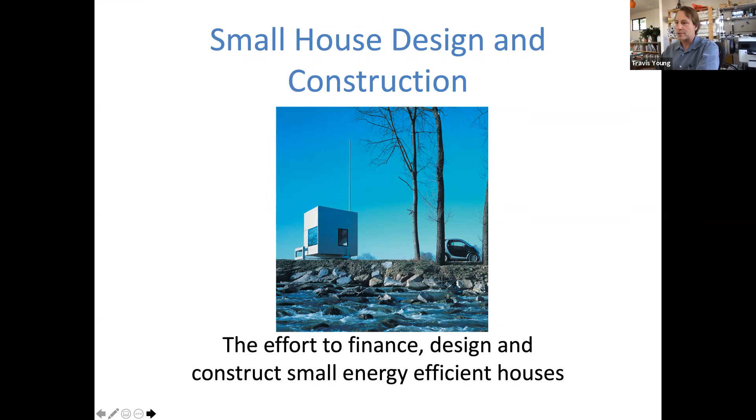If you like, we'll go ahead and share the screen here. Are you able to see my full slideshow? Yes, very good. Okay, so the title of the presentation is Small House Design and Construction today, and we're going to look at some of the effort it takes to do small houses, as well as some of the barriers.

So a quick overview of the presentation today. We're going to get into the definition of small house, because that's different for everybody. I'm going to look at the movement towards small houses, touch on some demographics and population issues forcing these changes and desires, some policy and zoning issues that affect small house design, several case studies with lessons learned including cost analysis, and finally a net zero affordable housing project.

So we'll start with definition. I wanted to speak to an acronym I'll be using here, ADU, which stands for accessory dwelling unit. This is defined in the International Residential Code as a building accessory to the primary use on a residential lot. The city of Austin in particular has an accessory dwelling unit ordinance, and accessory dwelling unit is the fairly common term for this second smaller house that might be on a single family lot throughout the country in different municipalities.

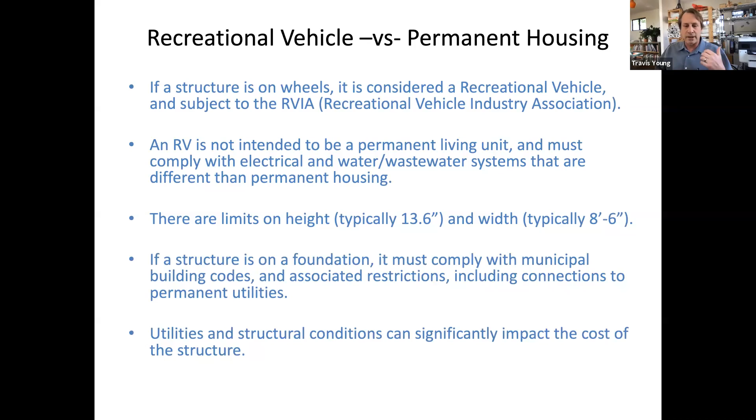But I heard many stories during our snow apocalypse about people going into their RV because they had a solar generator and were able to get a little bit of heat in there and using that as a place to weather our weather event. Here you go, just one of the latest additions.

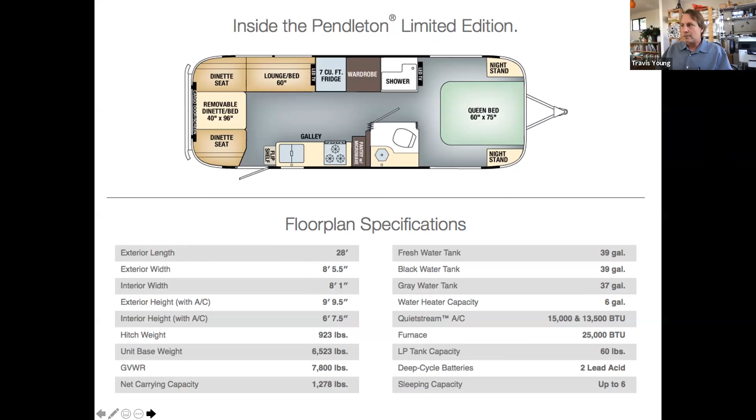You got 2-bedroom potential with the removable dinette. These are really built like ships, very, very efficient uses of space.

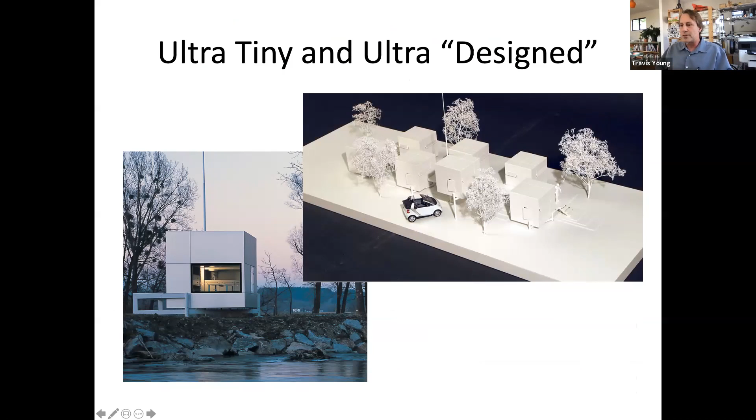Another aspect of these ultra designed, ultra tiny homes. This is a good example where you can share 76 square feet with 8 of your favorite friends. They look very happy.

So a brief look at Texas's demographics. In Austin and Houston, for example, we have between 40 and 60 people a day moving here. And most of these people are single or two-person couples. They're maybe non-married or about to be married. Many of them are college educated in Austin, for example. And the median household income is about $71,576.

An interesting statistic associated with this population growth is that the number of households with children has declined. So we have smaller households, and that is also pushing this desire for maybe a smaller unit. They haven't really had their children yet and realized how much more space they need to have.

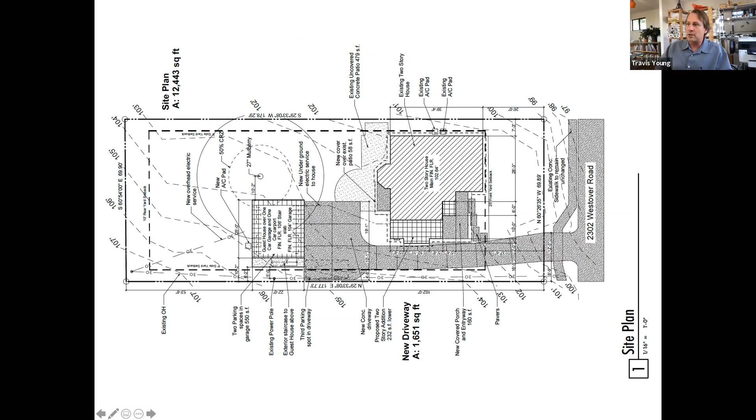This particular project was permitted as two-family, meaning it was an accessory dwelling unit under the City of Austin code for the garage apartment. However, in this neighborhood, an attorney who lived several houses down saw this going on, went online, and saw it was a second living unit. Even though a living unit already existed there, he sent an attorney's letter notifying us that this was not allowed, that we could not have a second living unit on the house, and that he wanted it removed. This happened about halfway through construction.

So the City of Austin has a regulation called a guest house — any lot over 10,000 square feet can have one. There are restrictions by City of Austin zoning code that you cannot rent it out to paying guests, so you couldn't do a short-term rental with a guest house. But the size limitations from the ADU don't apply. So a guest house could be allowed, and since they wouldn't be able to rent it to anyone, it wouldn't damage the value of the attorney's property, which was part of the attorney's claim.

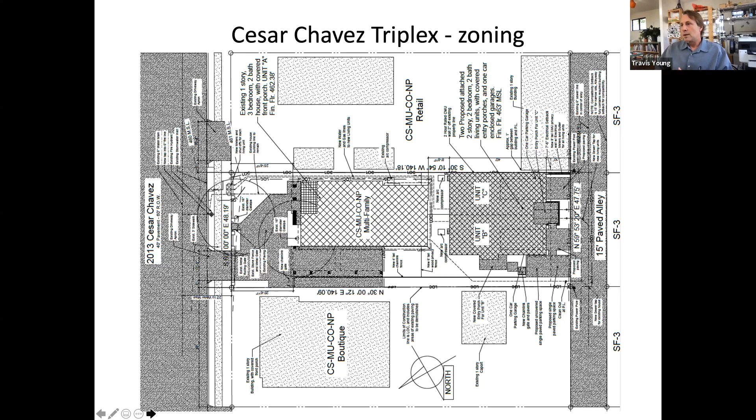So here's a quick look at the plan. Both units are about 1,100 square feet. We have a 1-car garage for both off the alleyway, a bedroom and bath down, and then upstairs you have the living, kitchen, dining space and another bedroom and bath up.

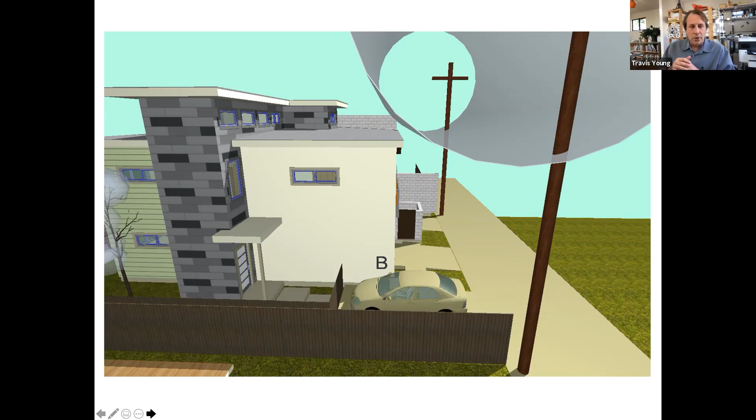Although the CS commercial services zoning allowed us to have a 0 setback condition up to the property line, the City of Austin utility has different ideas about that. We had overhead power lines in the back of the property. This cylinder you see in this 3D image is around the overhead single phase conductor that's on the end of this outrigger. We had to be 12 feet from that, and you can see I'm just clearing that with my roof line.

So even though zoning may allow you to do something, there's a lot of other bodies that have a say about what, when, and how. Even though there was no public utility easement here, they still review this plan. I didn't pick out the colors, nor the Home Depot fan.

So at the time I did this, even though we had the MU zoning, the City of Austin has 2 departments for building permits, one for commercial and one for residential. Residential looks at duplexes and 2-family and single family, and commercial looks at multifamily. Well, because the building itself was a duplex, the commercial permitting didn't look at it.

However, they looked at it for site planning, and for site planning we got a site plan exemption because we weren't exceeding a certain amount of square footage in terms of new impervious cover. This back area was paved and had a building on it, so we were under this limitation of what we call a site plan exemption.

So I got the site plan exemption, and then I went to go get the building permit with commercial, and they said, we're not going to look at it, you got to go to residential. So I went to residential, and they said, we're not going to look at it, it's multifamily. So they essentially gave me the building permit with no plan review because neither group would look at it.

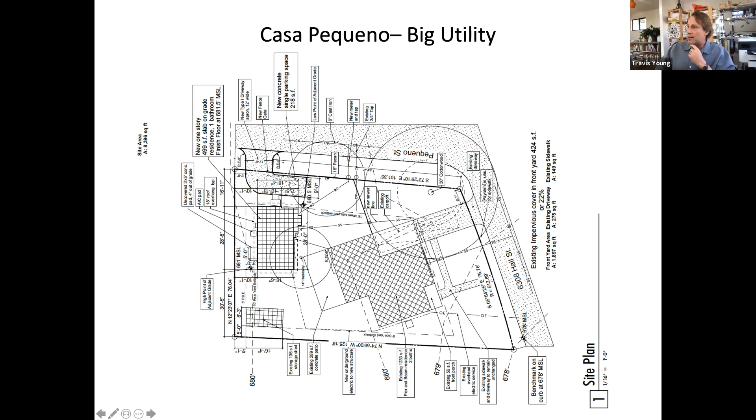Here's a quick look at the plan. It's 500 square feet, a little petite house. She really wanted a king size bed and a fireplace. So here's some 3D looks at the building.

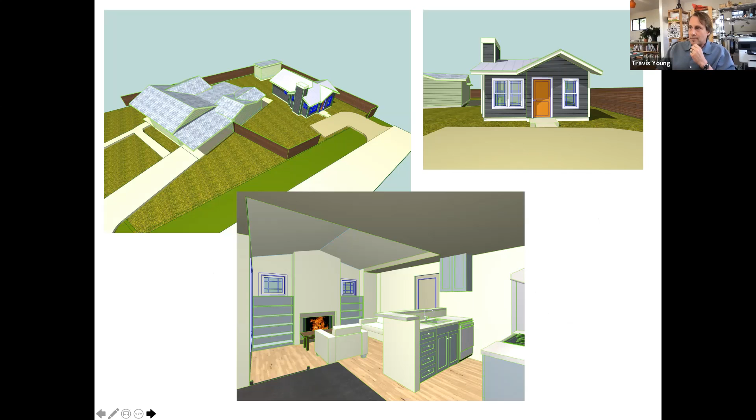Now, at the time that we did this, the utility required a new water meter if there was a second living unit, regardless of size. So because of that, we had to go through a utility tap permit process. At the time, there was no timeline for when the utility would have to review these plans. They didn't have a lot of mechanisms for reviewing them in residential, and they had just shifted from actually installing a lot of their own taps to hiring third parties, making the developers or whoever was doing the work hire a third party to do the utility lines.

This ended up taking about 4 months to finally get the building permit. We had to pay a civil engineer to do the utility plan and pay for this new water meter and tap—those were permit fees. And then we had installation costs from a third party to go out there and dig in the right of way. They have to be a bonded contractor, at $15K. So just the utility costs alone for a 500 square foot piece were $42 a square foot.

And the client, of course, was like, look, I look on Builder Trend and this is how much these houses should cost. Why is it costing this much?

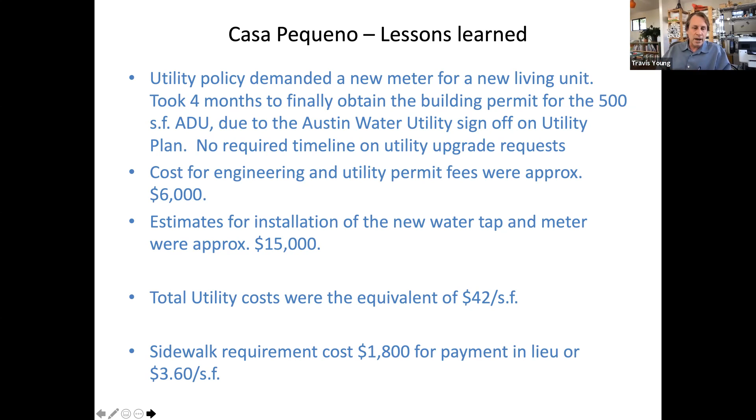Well, unfortunately, in this case, the mother-in-law's cancer progressed too rapidly, and she ended up passing away before we were actually able to finish the project, and it did not get built. The property owner sold the lot to a developer and moved out of Austin, who immediately put a much larger ADU in the back.

Now, in 2015, City of Austin tried to say that they could get approximately 50,000 new living units if they allowed an ADU to be on all of the houses. In the past, it was restricted to 7,000 square foot and larger lots. The new zoning ordinance allowed the ADU to be on 5,750 square foot or larger lots. This covers the vast majority of lot sizes in the central city of Austin.

They put a limitation on the size of an ADU: only 550 square feet could be on the second floor, so it doesn't loom over your neighbor. There's a lot of concern in neighborhoods that these buildings in the back might loom over the neighbor. They said it could be located to the side and rear of the principal structure.

And the parking requirements—initially when you could do an ADU, you had to provide a single parking spot for that ADU, like you saw on the small house I had to do, which would often include having to have an apron in the driveway and roadway to get there, and you'd have to pave it, et cetera. But if you were within a quarter mile of the Imagine Austin Activity Corridor, which is primary corridors where they're trying to encourage pedestrian traffic, then you could get rid of that parking spot.

Also, and not in small part because of my advocacy and 3 or 4 other architects, the Austin Water Utility, with our experience with that small house, changed their policy and allowed people to start doing ADUs when they saw the real economic impact on a small family living in a house, the economic impact of the utilities. They changed their policy, and now we are allowed to do an ADU in the back of the house and stay on the same meter as long as we don't exceed a total of 4.5 bathrooms on the site, or less than 45 fixture units. This is a critical policy change that's affected the ability to build ADUs.

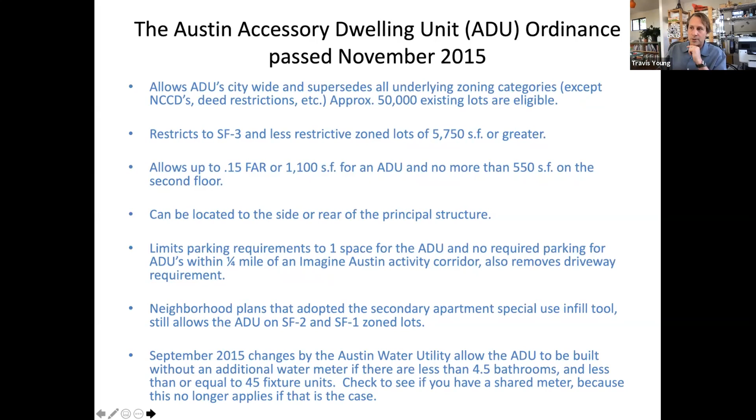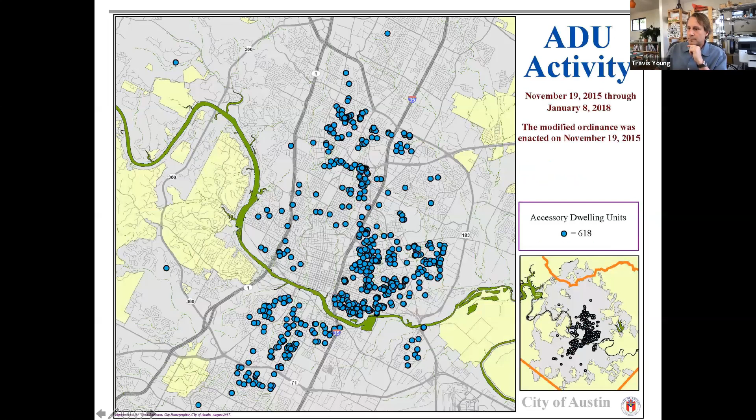With the ADU ordinance, we had a spring up of a nonprofit organization. Just wanted to talk about these fellows because they're great. They provide affordable housing, and a turnkey solution to get you what they call the alley flat, in a lot of the east side houses or neighborhoods of Austin where you have existing single family stock, smaller lots, but alley access. They provide this service for folks that meet 80% of median family income, providing subsidies to not only design and permit, but also construct small houses in the back of properties. Here's a couple of examples of those.

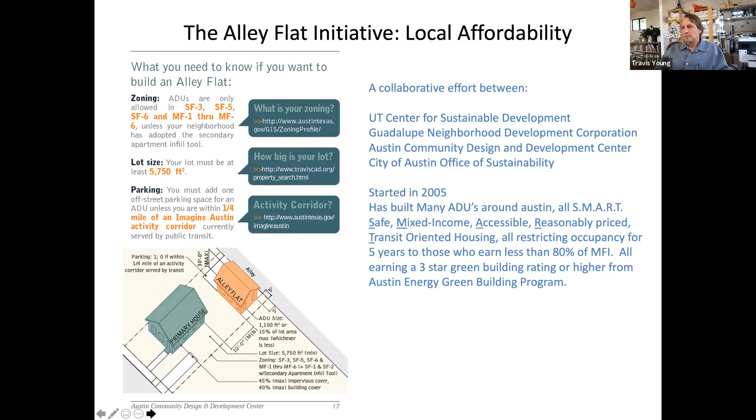Sweet. You can see 849 square feet, 2 beds.

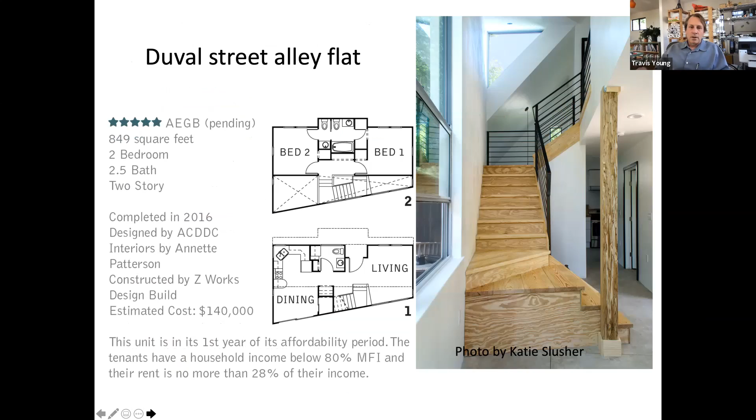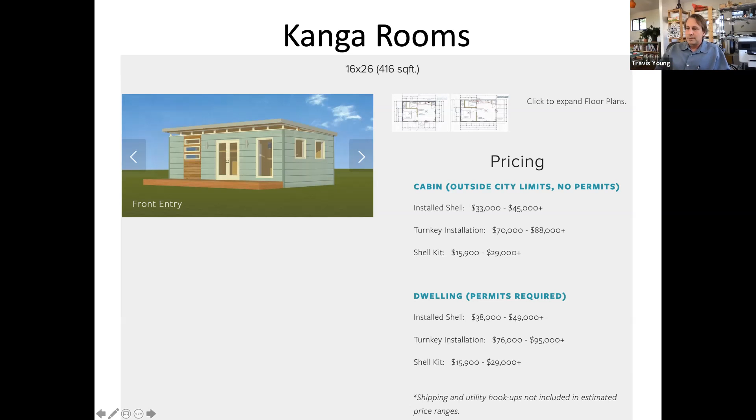There's also been some market rate groups. You saw in that video the one that went to the big 330 square foot house - that's by Kanga Rooms, they're still here in Austin. Just wanted to point out one thing here: their turnkey installation is 70 to 88,000. Of course that does not include shipping and utility hookups. Not a small amount of money.

So we did not put a kitchen in it. Now, the City of Austin defines a living unit as having all needs for sanitation, sleeping, and the preparation of food. If you eliminate one of those, then it's considered an accessory structure. Once you provide all of those - a kitchen sink, a bathroom, and sleep quarters - then you are an accessory dwelling. So we permitted this as an accessory studio that did not have a kitchen.

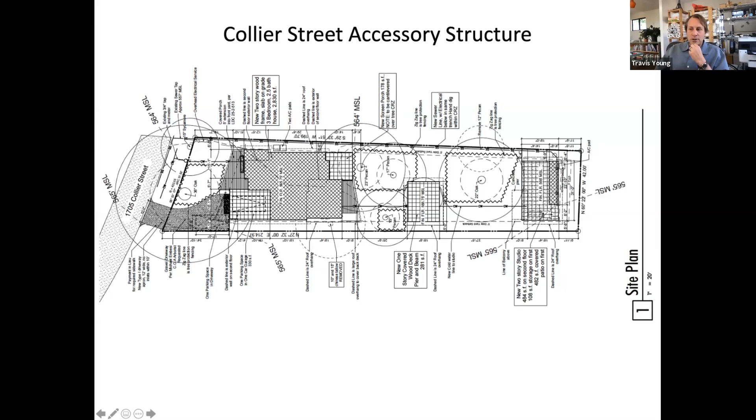It's an efficiency room here with some built-in cabinetry, Murphy bed, tight little bathroom, and then downstairs is a covered patio. One of the concerns with these - we'll get into this a bit with our net zero stuff - is how do we get hot water. In this case, this whole build was a 5-star green build. I was the architect and builder for the project, and we had enough space to design for a heat pump water heater, which is allowed for a house that has no gas. We elected to eliminate gas from this site and use all electric for this development.

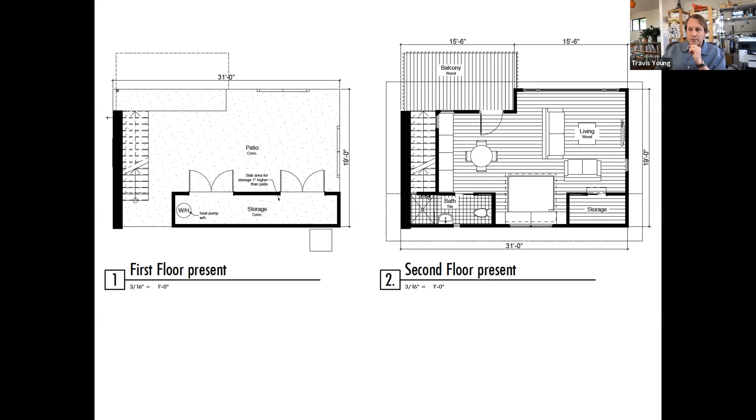I've got 2 speculative projects we're going to take a quick look at, built after the ordinance passed, around 2015 and 2017. We have a single family house and an accessory dwelling unit in the back.

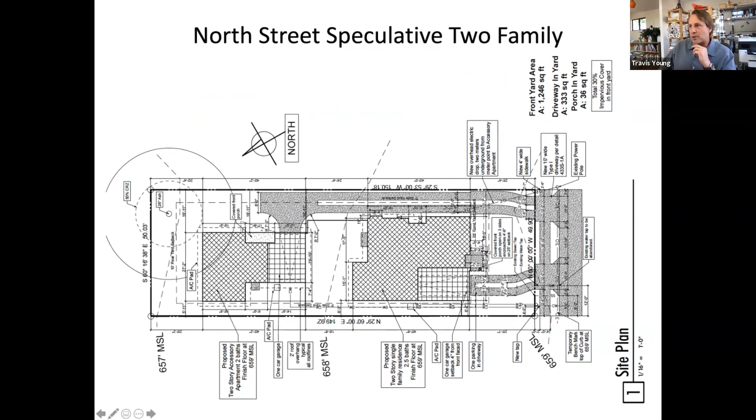This one is an 850 square foot unit with 1 bedroom and a bath down in a very tight space. The city of Austin has a restriction on gross floor area for residential construction within the urban core, and anything over a 15-foot high ceiling has to be calculated twice towards the limitations you're allowed on the site. So in this case, we have a 14-foot ceiling, which is just under, and we have another bedroom and bath up on the 2nd floor.

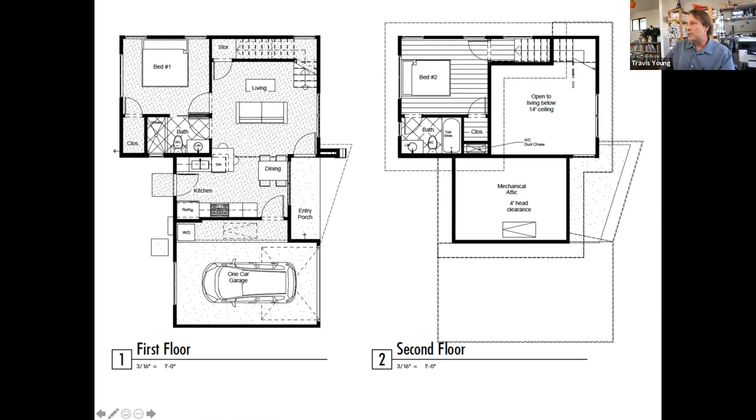On this 2-family spec, the property was bought for $365K, and the project was built for around $460K, or about $160 per square foot. That was the cost to the developer with no builder percentage, not including insurance or other things. This was not a GC project—the developer was the GC.

The 850 square foot unit was put on the market at $350K, and the 1944 square foot primary unit was put at $605K. The small unit got 4 offers in 3 days and sold over asking price. We had young couples send pictures of their family to the builder, imploring them to accept their offer, showing their dog.

They were looking for a place for their dog and their child. A single mother, for example, sent a picture, effectively begging to let them accept their offer to live in the small unit. At the time, the market wasn't quite what it is now here in Austin, and it took 8 weeks for the larger house to sell—they actually reduced the price finally to get it gone. That is no longer the case.

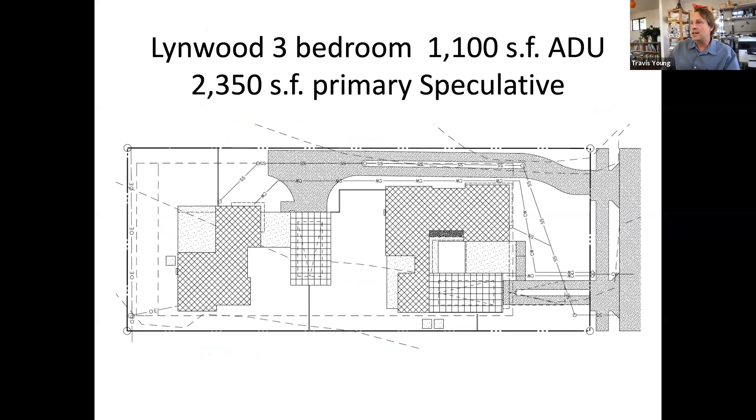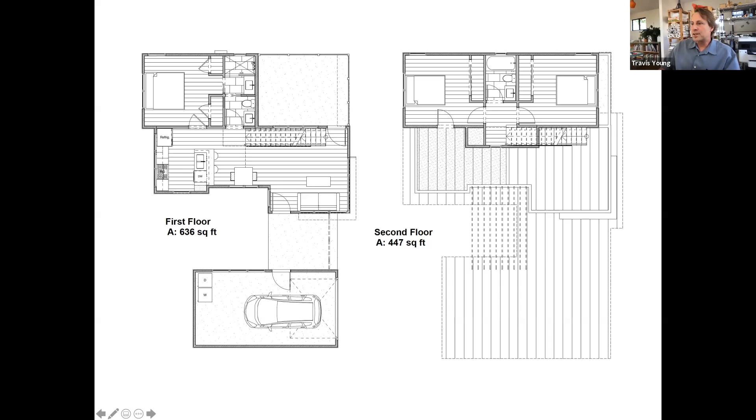Now, the whole reason to try to get 3 bedrooms—the developer was thinking this is for a family, a family's going to want this. And if someone has 2 kids, it'd be great to have 3 bedrooms. But 3 bedrooms in 1,100 square feet is difficult.

An open stairway helps, and some windows out to a screen porch helps. The screen porch is exempt from that gross floor area calculation—it is underneath living space in the city. Austin has a very peculiarity about the size of porches being exempt from this, but if you have a living space on top of it, you only get 200 square feet of it exempt. So this is a 200 square foot screened porch.

So some real costs: $395K, $600K to build over 9 months. The people who went into the back unit just couldn't understand why the living space was so small. Ultimately, it wasn't a family that bought it anyway, even though they condo-regimed it and were prepared to sell both. A millionaire came in from South America and just bought them both, and Airbnb'd the ADU to help fund it.

Now I have 2 more projects to look at, with a little bit more detail on the construction costs.

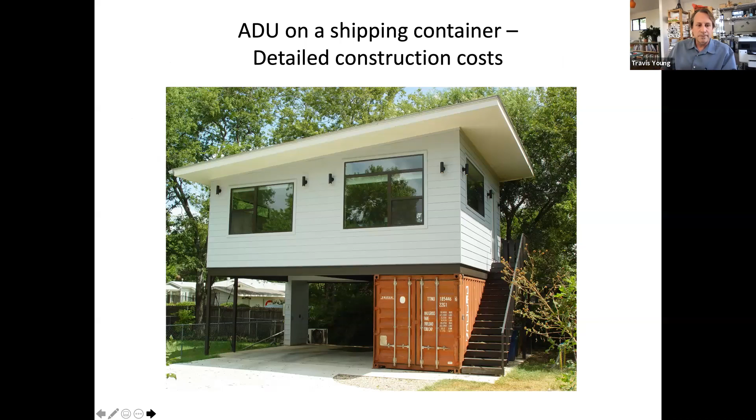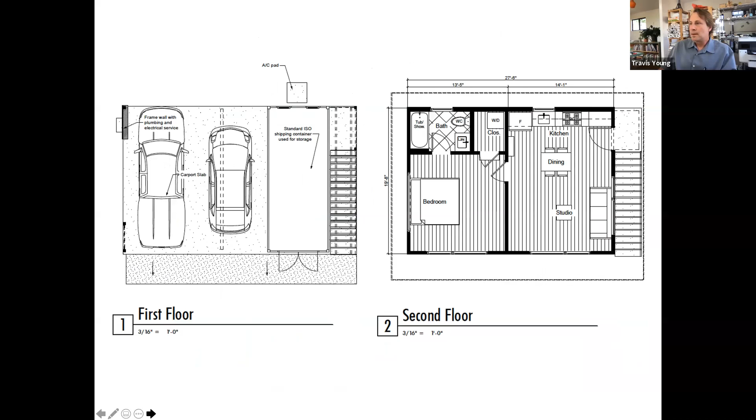But for $2,700, there's a shipping container dropped. Good luck. Well, that thing weighs 3.5 tons empty. So now how do I get it on my slab?

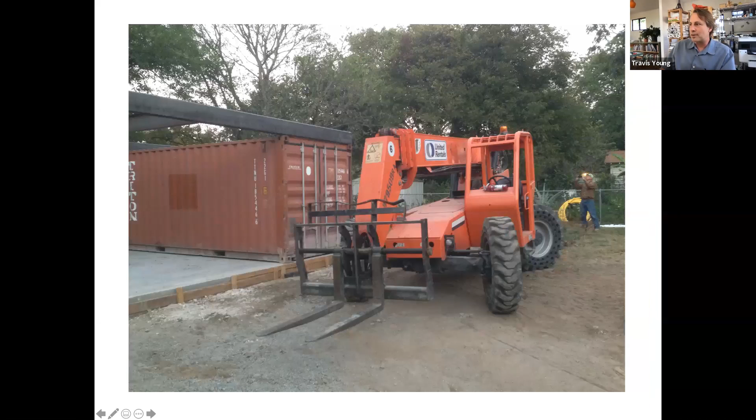Luckily, my welder was also a licensed forklift driver, so we had to rent a VersaLift. And he was able to position the shipping container for me. The VersaLift rental was $1,000.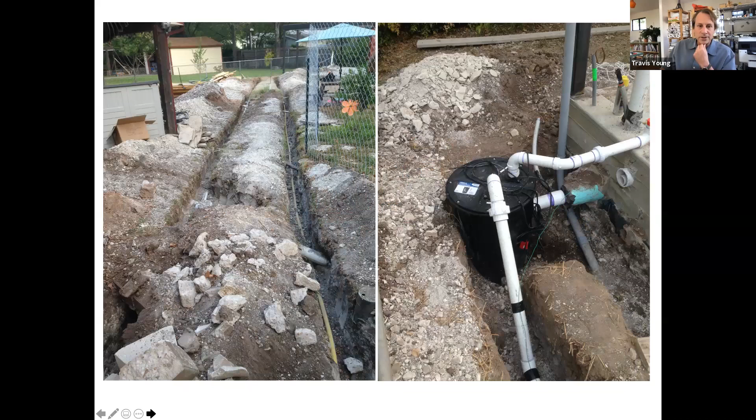Utilities, including a sump pump, were required. Where do all these utilities get up past the carport and into the unit itself? We have AC, a compressor, Freon coolant lines, the sewer, I got a gas water heater on the other side of this, water and sewer coming up through this small little section.

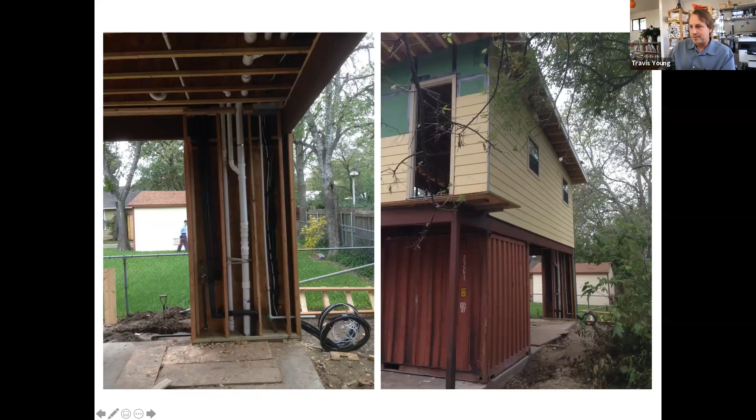And I thought it'd be great to use TJIs as an efficient use of lumber for the floor. Even though I told them they couldn't do this, the guys that were actually on the site didn't pay attention and went ahead and drilled through the shear section on those to put in the Freon coolant lines for the mini split system. So I had to come back in and structurally shore this section up. Stuff happens during construction.

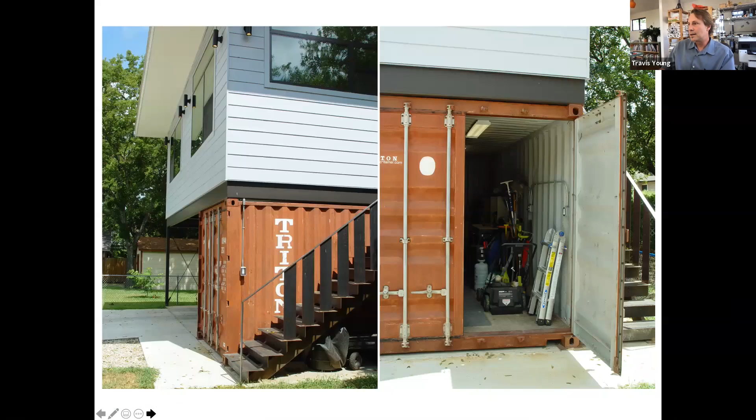So there's the finished structure. Exterior stair. IKEA kitchen. Solar ready roof.

There's a breakdown of the real numbers and costs for this. There's our shipping container, $3,700. Framing materials and labor, just kind of a lump sum number. In Austin in the last year, framing materials have doubled and in some cases tripled the actual cost of lumber.

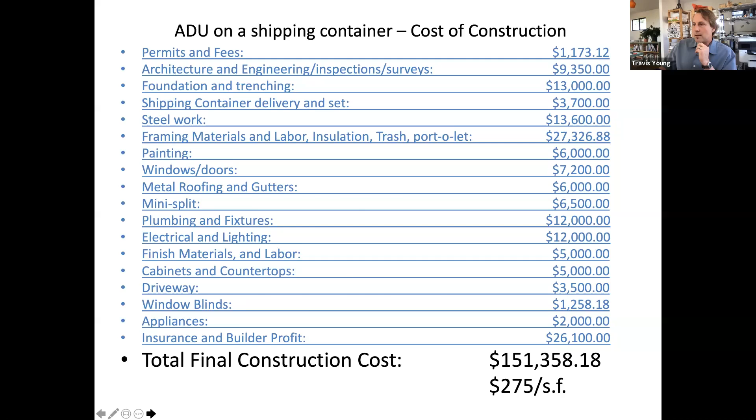Now, even though in the same neighborhood, people have been condo-regiming these accessory dwelling units and selling them for 300K at 550 square feet, those were not considered comparables. Luckily, the client was able to get another appraiser to come in at the number he needed, but it still was only valued at about 100K. So that's a very important thing to be aware of. If you're planning on that value, you need to consider that a lot of appraisers look at this as a single family lot with an accessory building that is not appraised at the same value as the primary house.

So this is the last project. This was a multi-year endeavor and is still being built. I was approached almost 10 years ago initially to start the work. This was a development of affordable housing put on by several nonprofit organizations in Austin.

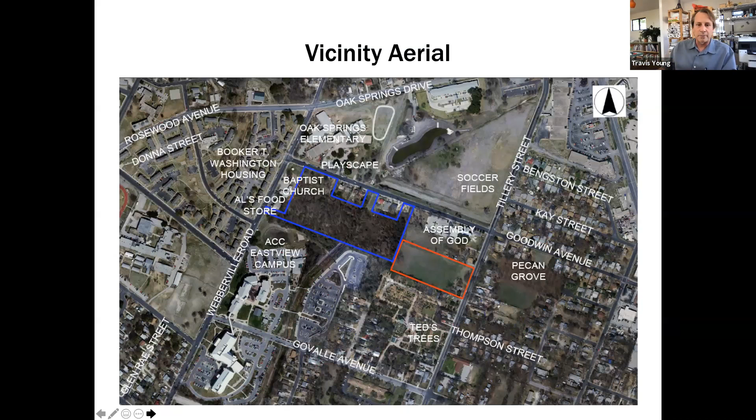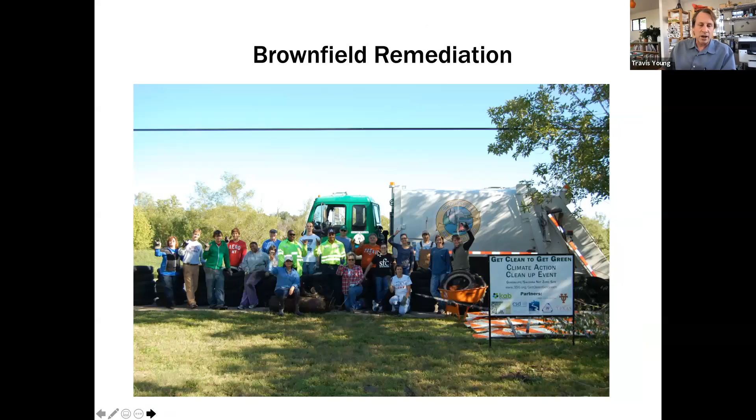We were invited on initially to do a lot of site planning work, just looking at how could we optimize the use of this land. There was a lot of impacts on it, including a flood zone through it. All of the work that was done by the nonprofits, as well as several architecture and engineering firms, was done pro bono. And that's all for the initial site design work.

We invited the neighbors in the area and had several neighborhood design meetings where they were able to give their input on what they would like to see built in this subdivision.

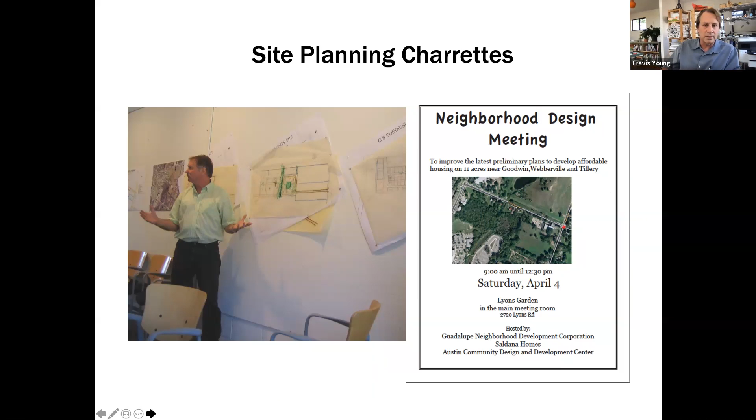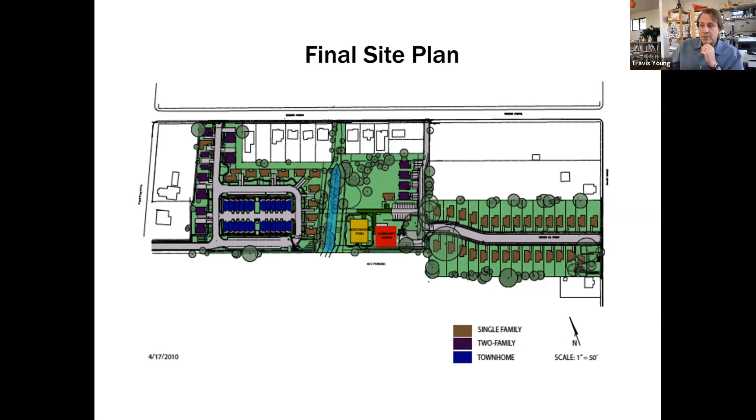Here's the duplex pieces that we'll look at a little bit more closely. A big team was involved in this project, including Austin Energy.

Some of the goals included a total of 90 living units, 100% of which are affordable. The duplexes are for rental to people with a median family income threshold of 30 to 60%, and we have ownership units for folks meeting the 60 to 80% threshold. We had construction cost goals of $125 per square foot, and a lofty goal of partnering with Austin Energy and the Green Communities Initiative, which provided a large grant, to be 54% better than code and offset that with a solar PV system, for a net zero average over the year.

When we entered into contract for the design of the actual buildings, we had to provide EnergyGauge modeling at all 3 phases of design, from schematic to design development to final construction documents, and we also had to provide construction cost estimating.

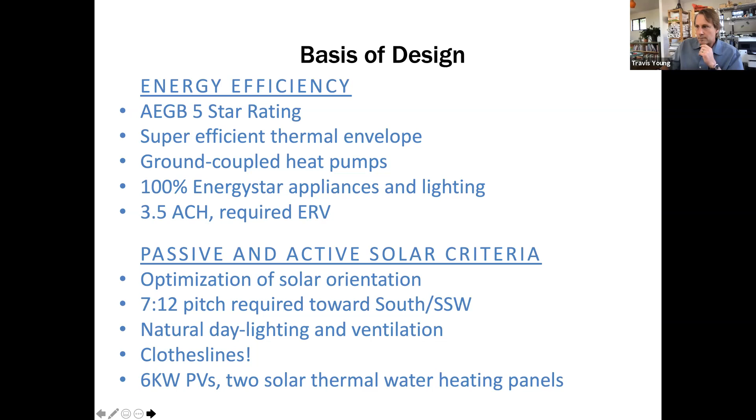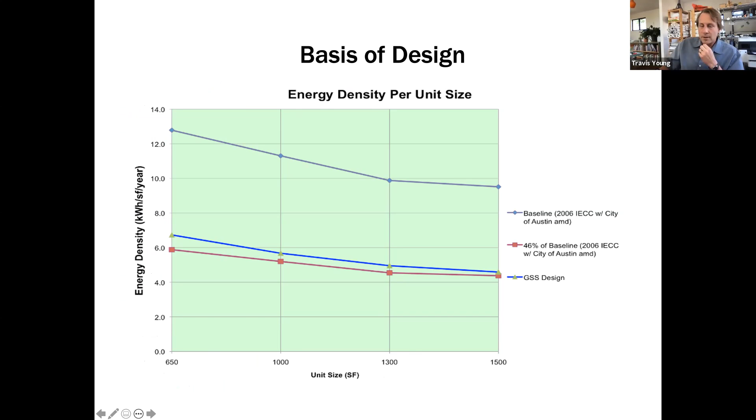We looked at the best way to build these given cost and energy efficiency, with a wide set of cases where the city of Austin, or Austin Energy, had numbers for energy usage based on new construction and construction method. The best average kilowatt-hours per square foot per year was wood frame with foam insulation. So for a variety of reasons, even though things like SIPs and ICF and other construction methods can meet energy goals better, the coupled desire for affordable housing meant our cost of construction had to utilize more readily available trades and materials. So a lot of mechanisms pushed us to wood frame with foam insulation.

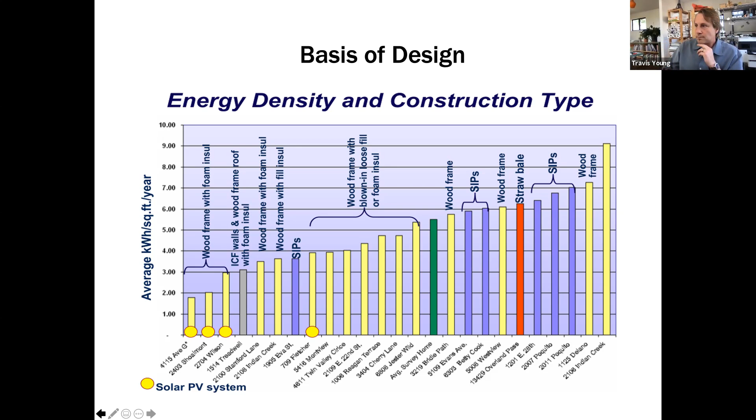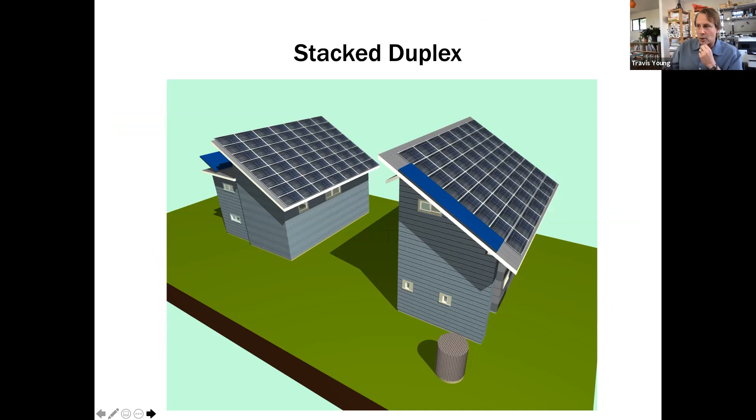And of course, we had to have quite a bit of a solar array. Even in the course of design, the efficiency of the solar panels increased, so we were able to reduce the number of panels you see here in these initial sketches.

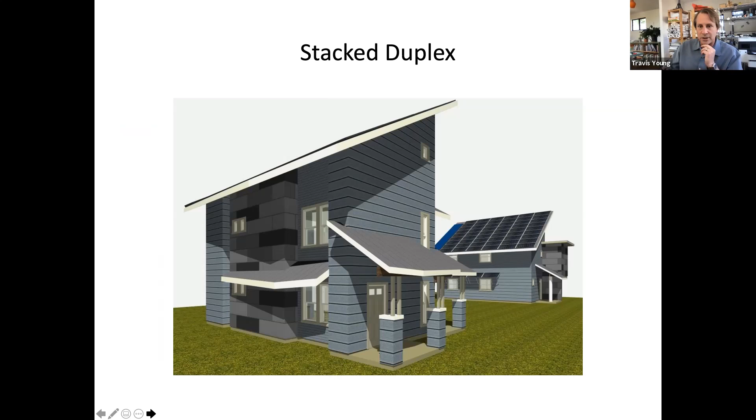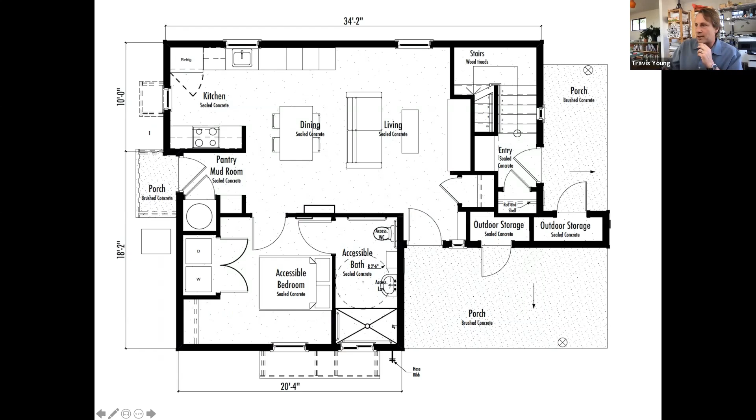Lower floor plan again—a fully accessible unit with bedroom and bathroom, accessible kitchen, and another entry point for the second floor unit. You'll notice these porches shown integrated with the slab, with a structural column here and here supporting the second floor. As you get to the top of the stairs, you have living, kitchen, dining, and 2 bedrooms with 2 separate baths.

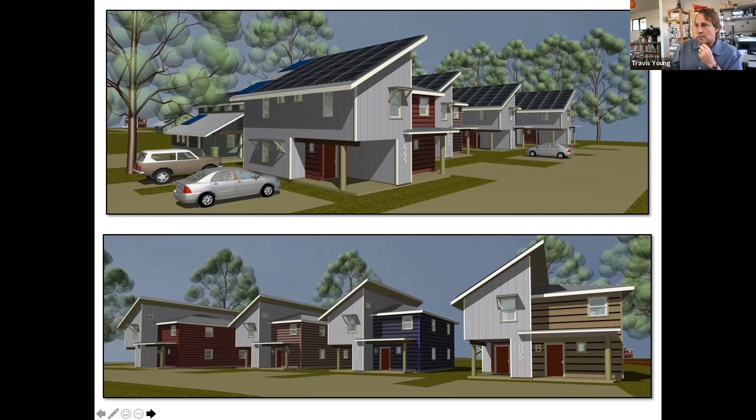So these were just some of the energy model outputs. The two that we're looking at in these duplexes that I'm showing you now are these.

We had a conditioned unit area of 656 and 996 for the second floor. This shows how we attacked certain numbers, like adding ceiling fans and dryers, the clothes dryer being a big ticket item in terms of energy use. But this miscellaneous number here, what is that? It's a huge purple number.

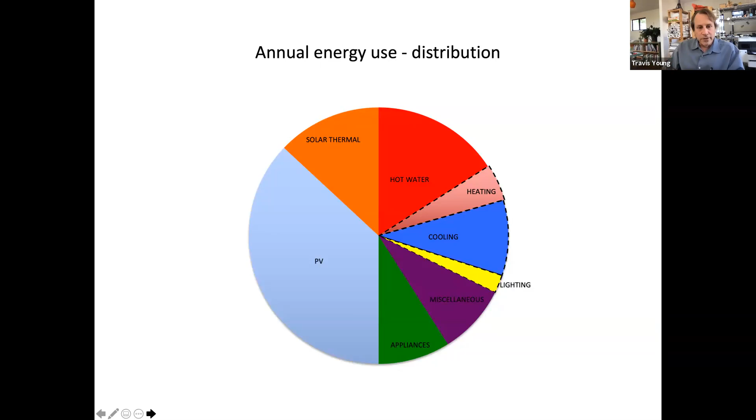So we have exterior walls that are 2x6. We used efficient framing systems so that we could line up our studs with our floor structure.

This was to minimize thermal transference through the stud. It has an exterior Dow SIS system, which is a structurally insulated panel, giving us about an R4 on the exterior plus spray foam on the interior. So we break that thermal transmission through the studs. But I just wanted to note that even though this is a great idea, we're going to cantilever the 2x6.

Sill over so I can cover up my insulation on the slab wall. When you actually frame something, we now have a huge air gap. So the realities of these types of things, when you think it's a good idea and when it's not, are very, very real. So we had to do special sealing of these types of situations.

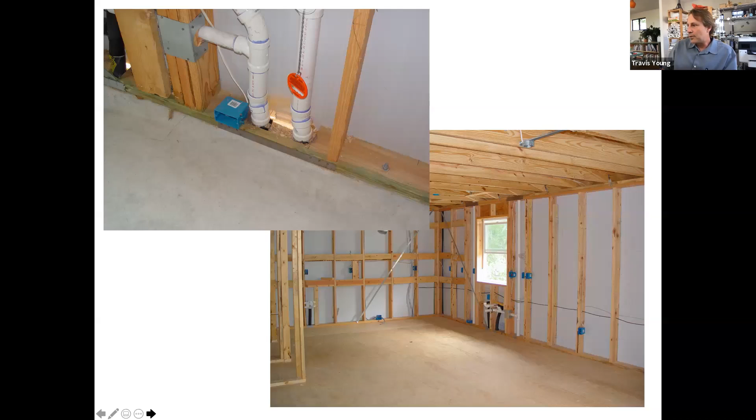And even though we insulated the slab around where the living space is, we have a contiguous slab that comes out to the porch, which you can see here. This is not flat work because it's supporting the structure above. And that is all integrated. We didn't have a thermal break.

It was just too expensive to look at that. So we just said, oh, we'll see how this works. We don't have a lot of slab exposure. Maybe that won't be that big of a deal.

The actual tenants that are here include a homeless veteran, a Vietnam veteran, who still lives in his unit, and a single family mom who rents one of the lower units and is now going to ACC campus.

So here are just the cost numbers on this. We did meet our construction base cost, our $125 per square foot threshold. However, we had some minor change orders.

We had to do some changes to the ADA showers because of uniform plumbing code and other things in the city of Austin. We couldn't do a roll-in shower without a floor drain. The floor drain added some costs.

We also added in some other costs associated with the actual site development that may not have been applicable before, but are now going to be layered over the whole subdivision. But because this was the first phase of the subdivision, things like the driveways, roadways, and curb and gutter, we applied towards this portion of development.

And then some of the professional fees, developer fees, architecture, everything else, soft costs, we came in at about $140 per square foot. So we didn't meet the 125, but we are adding probably about 15 or so dollars per square foot for site development stuff, a little bit beyond just these duplexes.

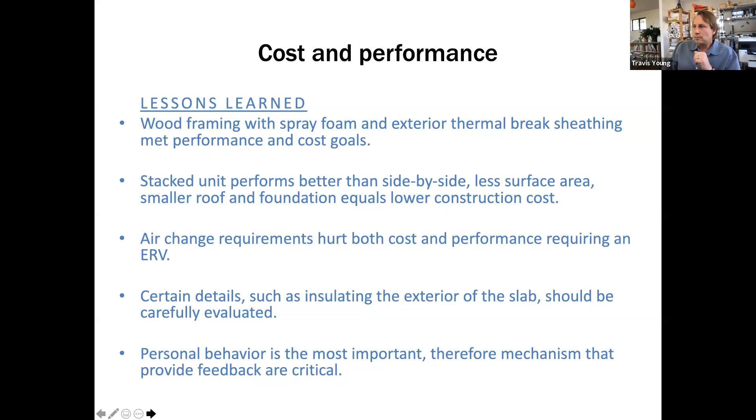And then this last bit of the study for you today is going to be looking at the occupancy and some review of what happened with these units.

We had mostly older disabled residents in the lower sections because of the accessibility. We've had almost a continuous occupancy since 2013. Our upstairs units have been occupied mostly the whole time.

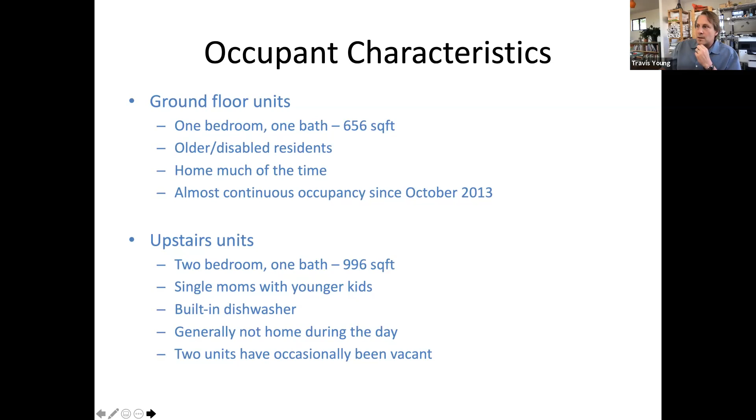Over the course of 42 months, our modeled averages for energy use were very close to our annual averages - very close. Some far exceeded, some under. We had one unit that just consistently did poorly, very poorly. There's actually something going on with the solar PV array where it's consistently produced less.

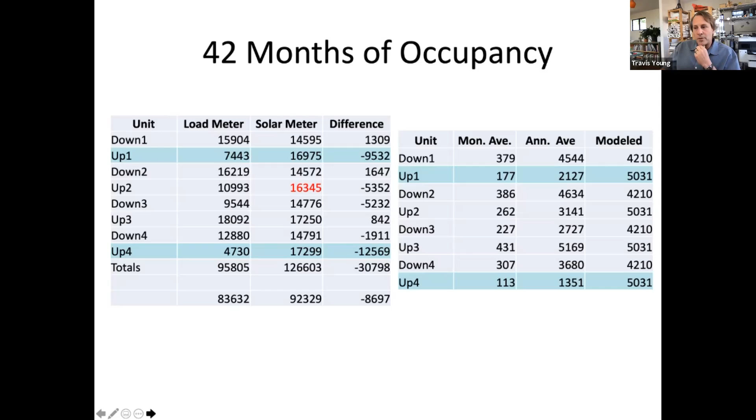Even though we've had the solar company out, we can't seem to find it. We also have an occupant that is a little bit loose with their use of their clothes dryer. Certain things we observe people doing: they put their air handler to the on position, meaning the fan's running the whole time. So now you have a base load you wouldn't have if the unit was cycling on and off per needs. People leave a room with the ceiling fan on.

The higher anticipated clothes dryer use - this one was really because people would have their friends come by and wash their clothes. Obviously a clothes dryer is one of the key drivers of energy use on the house. Hot water use was another one. We had solar thermal systems on these, but when people would take a shower later at night, it would have a bit more impact on the electricity of the system.

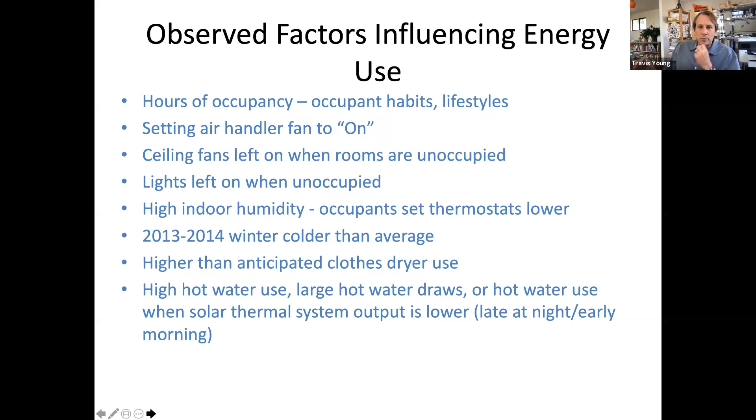Some unanticipated things: when we have the solar array on the roof and a metal roof and all of that, with a stacked duplex, you got poor cell phone reception. So people are going outside to talk on their phones and leaving the doors open.

We also didn't have any kind of feedback for the property owners other than every month. So if we'd had some displays like SunPower and others do, where we were able to pay for displays inside the house giving them a sense of where their electricity is being used, it probably would have helped a lot.

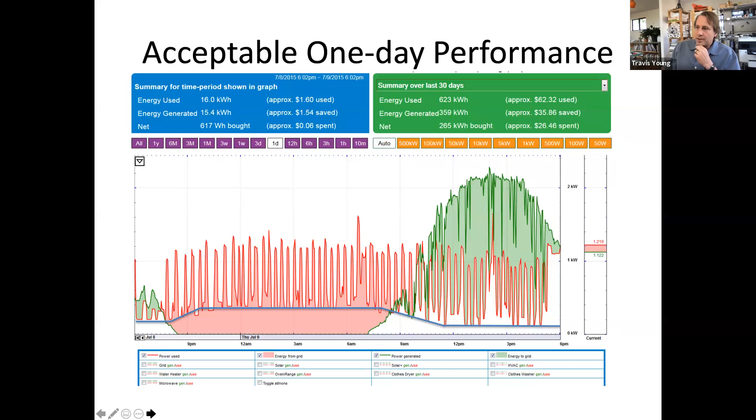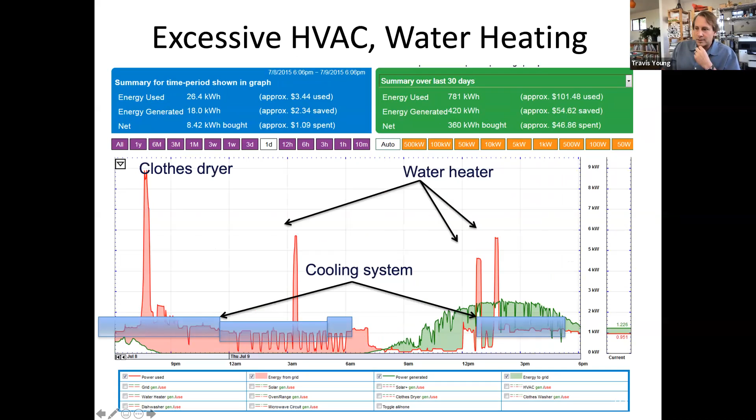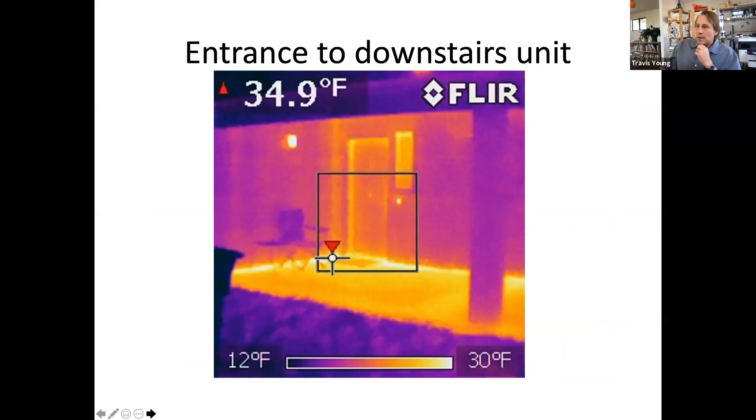So the last conclusions here: when you get the overall energy to very low levels, occupant actions have a huge impact. These little details about slab separation have a cumulative effect.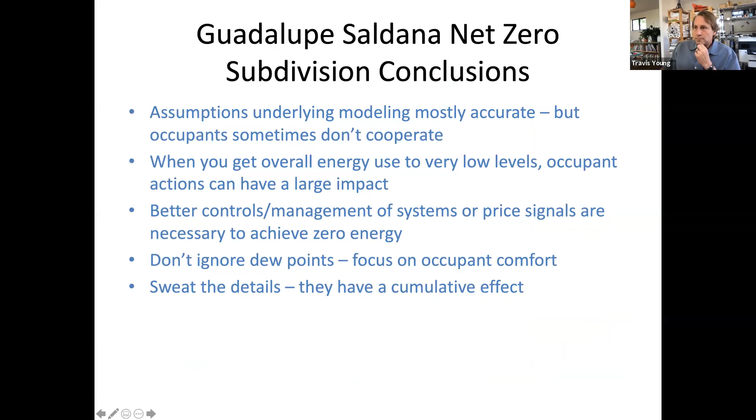Our small house movement is very strong for good reasons. Custom permanent ADUs are very expensive per square foot - costs are very high. But that lower price point allows more people to get in to become homeowners, especially when you do a condo regime on a single family lot. Adding more living units to single family development is very effective for cities to add density to the urban core, but it is very costly.

Cost of construction is directly related to these green features. As we've looked at our new IECC, for example, these keep escalating. Our envelope requirements in terms of U factors are escalating, our fenestration U factors, et cetera, and each one of those jumps also increases our cost.

So that concludes my presentation.